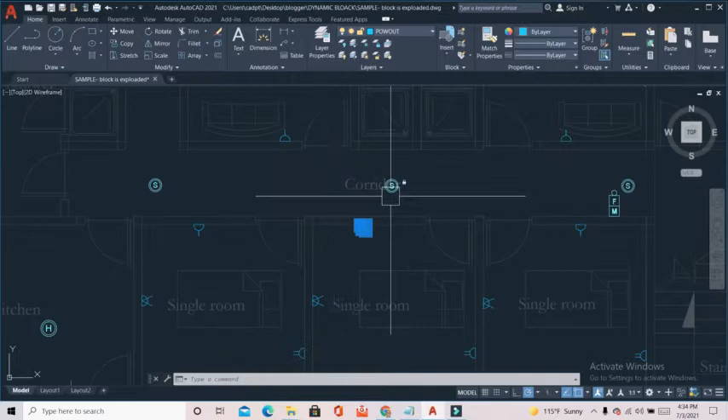Okay? So it's not one, it is exploded.

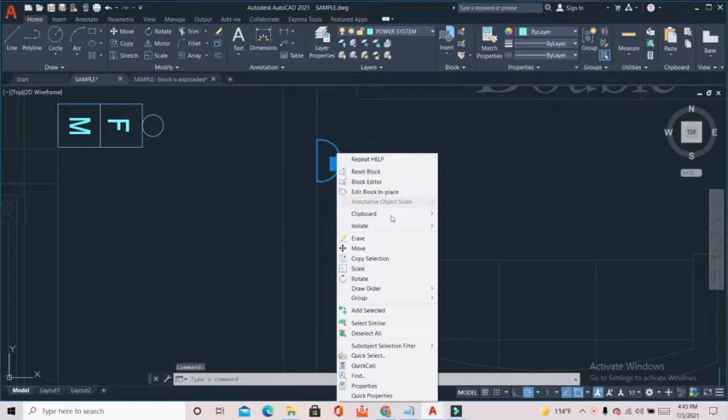So when you quantify these devices or equipment, you just click the device, then select similar, okay, then select quick properties. So you have 9. If you count it, highlight 1, 2, 3, 4, 5, 6, 7, 8, 9.

So what if our topic today is how to quantify devices if the block is exploded? So how do you count that one? How do you quantify that if the block is exploded?

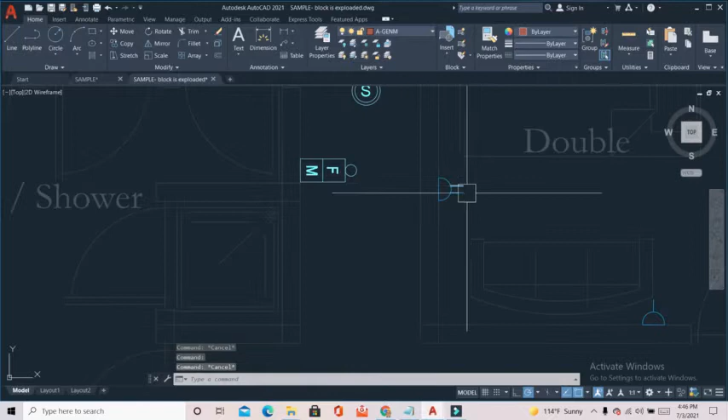Meaning to say, let's go to another drawing. This is what exploded looks like. Because we can use the same technique, but you need to double check. This drawing is only a small drawing, but it's very difficult to quantify if it is exploded blocks, especially if you have a big plan. But this plan is very small, so it's easy.

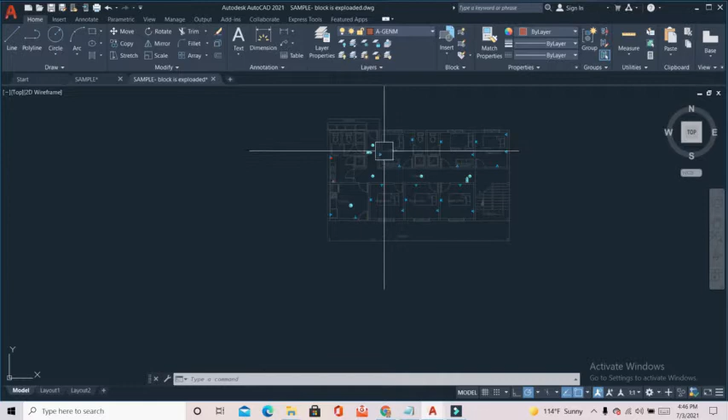But I will show you how to count this one. Last time, when you say select similar, it selects similar, so all of one type of power like this shows it has been selected.

So meaning it's wrong. So how do you quantify this type of device or equipment if the block is exploded? So you want to know? Okay, I will tell you guys.

So the best technique for this is you need to make a block which is meant to be a circle. So we make a circle like this, just any type of circle. Then you name it a block, make it a block, I'll say C1, like that, for example.

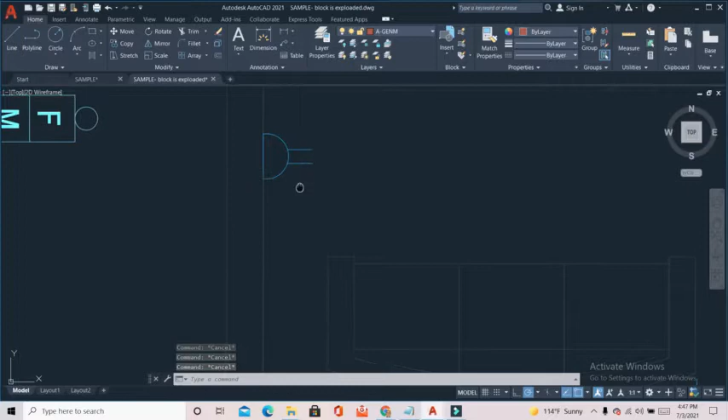So pick a name, then select object. Now this type of circle is already a block. So I teach you guys how to quantify now, especially all the same type of devices. Just go to your circle, just count, just put the circle on the devices that you want to quantify, anywhere. So you want to count this one, all circle. It's very easy guys, this is the technique.

As per my experience, this is what I did. This is not so critical because the plan is very small. But if the plan is very small it's easy, while if the plan is very big, guys, it's very difficult.

Okay, see, so all the duplex sockets already have the circle put on them. Meaning to say I put my block circle on that one. So now you can quantify this one.

It's easy, just click select similar, then quick properties. So there are 8. So 1, 2, 3, 4, 5, 6, 7, 8. And 8.

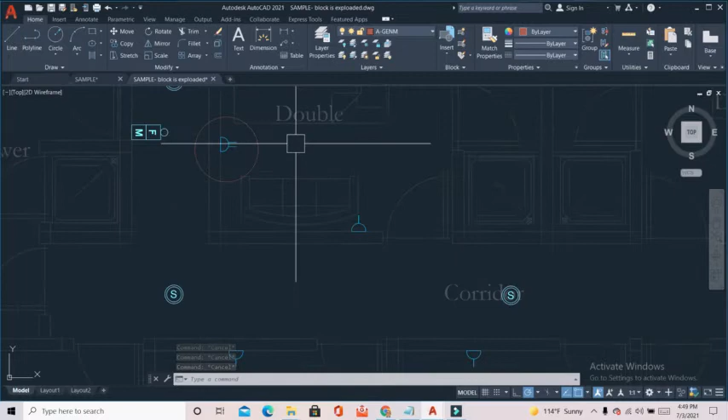Okay, now you can quantify. So I go back. What if we quantify without using this block, without making any block? Like this, for example, this type of socket.

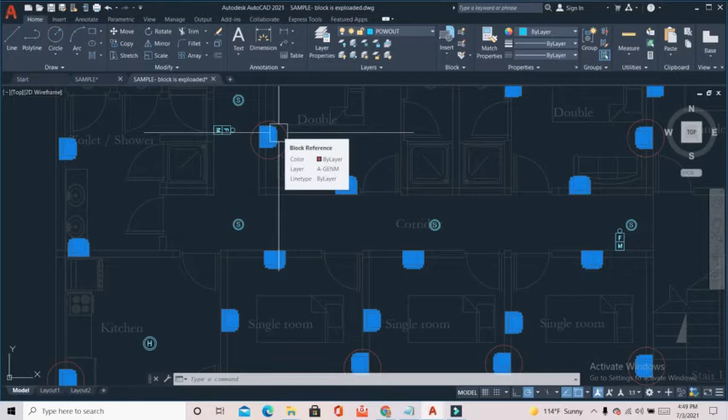Simply wait. Okay, how many? It's too many. Even the one we already put the block circle on is one. So there's a tendency that your quantity of a device or gadget will be wrong.

So the technique is just make a circle block. I mean to say, we make another circle, okay. We make another block.

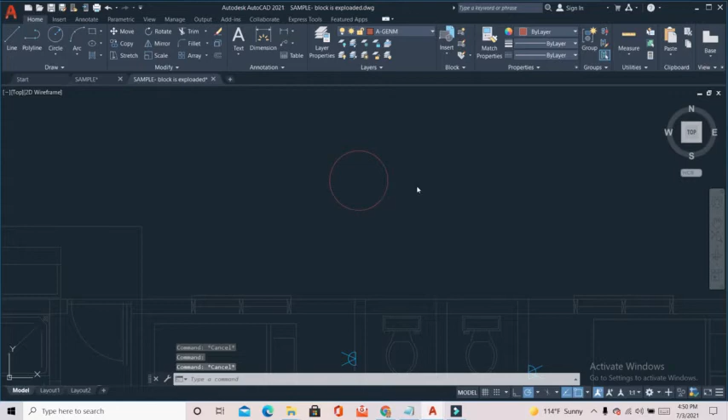So we need to explode this one, and then block, type simplex block. This type of block is simplex, but that's the device itself.

Okay, don't worry about the colors guys, don't worry about the layer here. So this block is simplex block. So all the simplex gadgets or devices, just put the circle on them.

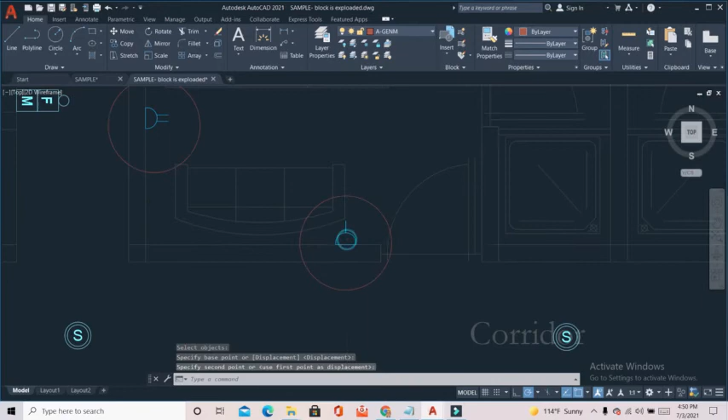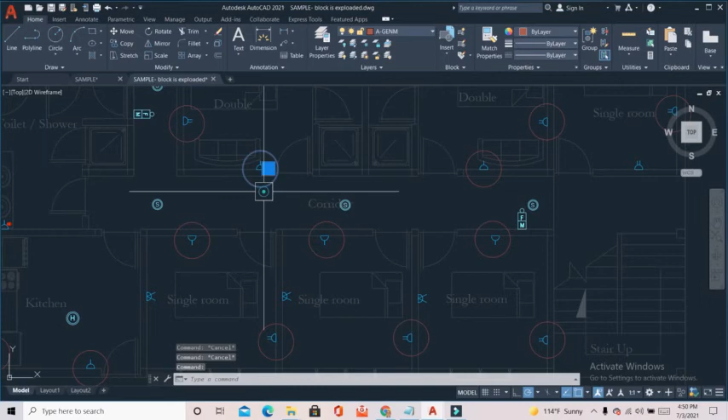Okay, or the circle, okay, easy. So now we can select now. Select similar, okay.

Once the similar simplex blocks have been highlighted, right click, quick properties. So there are 6. As we count this one, 1, 2, 3.

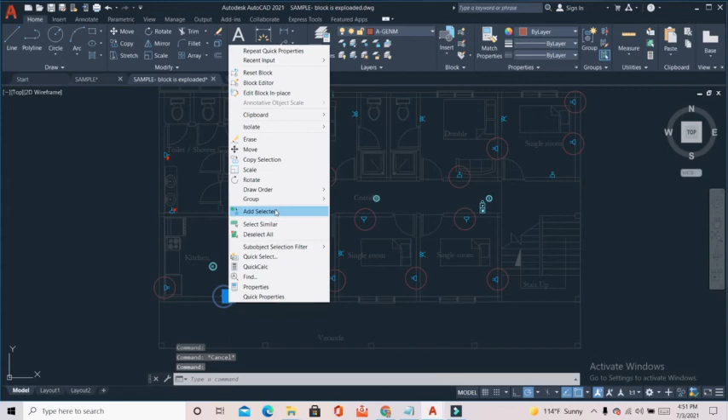Oh wait, I will show you. Quick properties, oh wait. Select similar, then quick properties. So they are highlighted 1, 2, 3, 4, 5, 6.